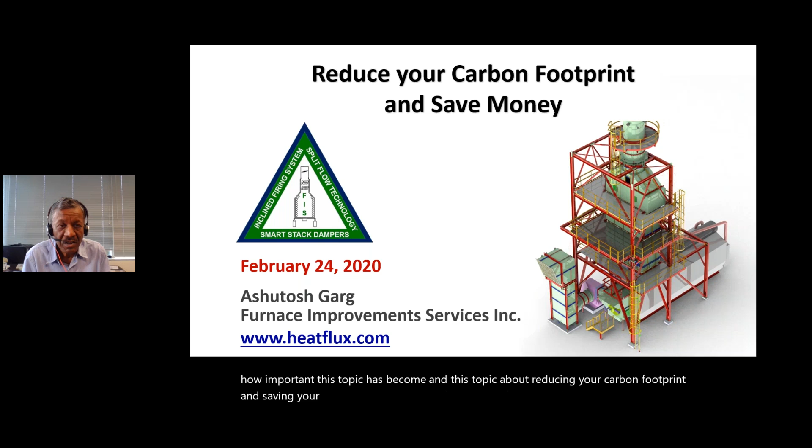So today we will be talking about a very important topic. This topic not only concerns us, but it also concerns every human being on this earth. That is how important this topic has become. And this topic about reducing your carbon footprint and saving your money, some people think it is almost like an existential threat to mankind, the global warming.

So I thought we will talk about this important topic and see how we can do our part, reduce the footprint in our refineries, carbon footprint in our refineries, and at the same time save money so that these projects can pay back. So that's what we will be talking about today.

Especially, all of you know that fired heaters are a major source of carbon dioxide emissions in refineries. It's been categorized as a pollutant and accounts for 2/3 of all the greenhouse gases. So many countries are now imposing tax on emissions of carbon dioxide. I think all of us need to do our part by reducing our carbon footprint. One way is to improve the fired heater efficiency, and that's what we will be focusing on in this webinar.

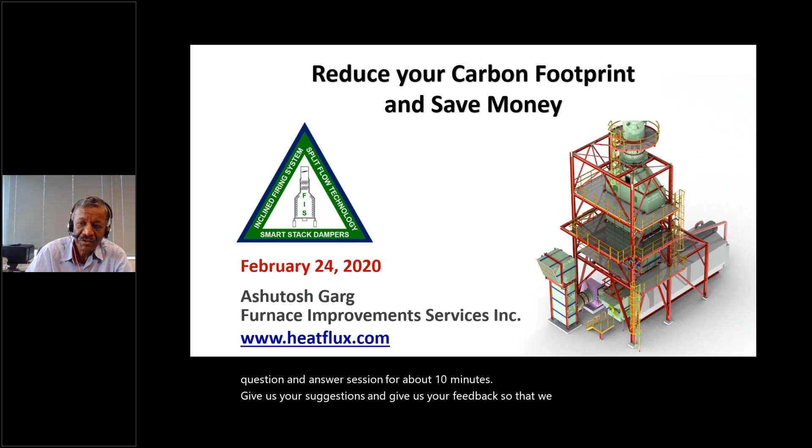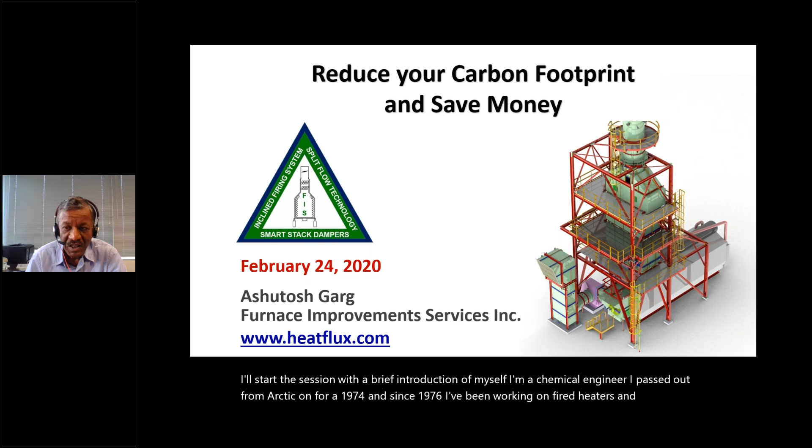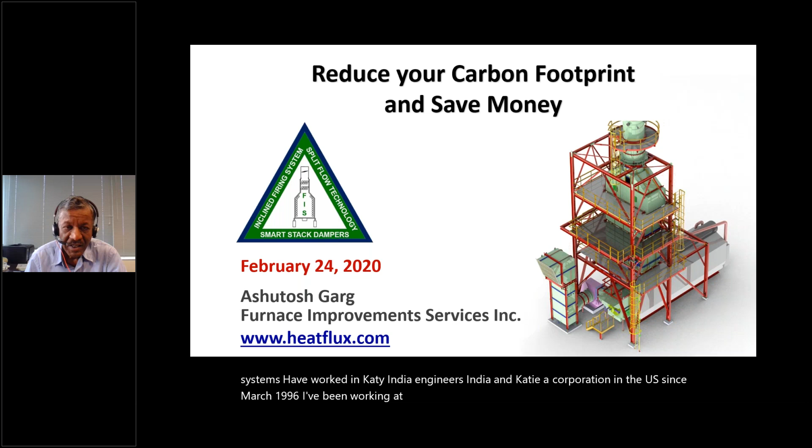I'll start the session with a brief introduction of myself. I'm a chemical engineer. I passed out from IIT Kanpur in 1974. And since 1976, I've been working on fired heaters and combustion systems. I have worked in KTI India, Engineers India, and KTI Corporation in the US. Since March 1996, I've been working at Furnace Improvements, improving fired heaters for the past 25 years.

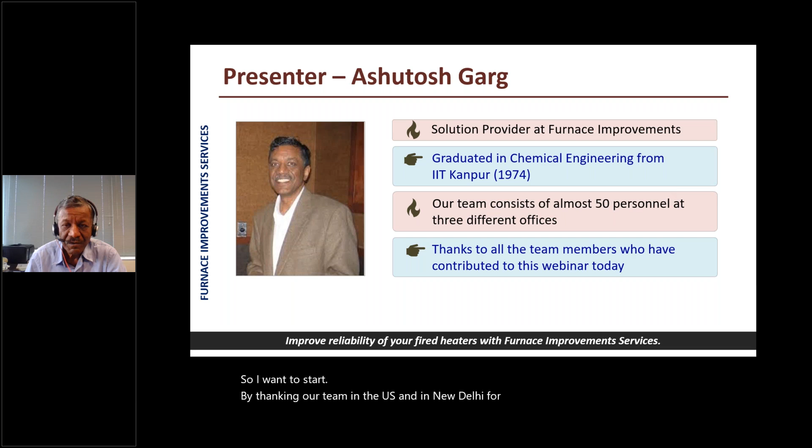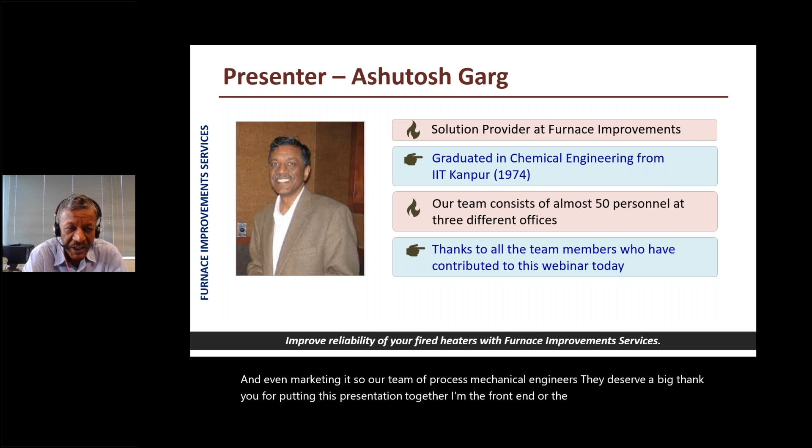Before we talk about our webinar, I need to tell you a little bit about our company. Furnace Improvement started in March of 1996. We'll be completing 25 years next month in business. We currently have 3 offices. Our head office is in Sugar Land, Texas. We have an engineering office in Noida, India. We started it in 2005. We have about 35 people in that office, and this team is doing everything.

They are doing process, mechanical, structural design, drawings, as well as drafting. We also have a 3D modeling capability. We are a full service heater company and we execute projects on a turnkey basis, including erection. We have a CFD office in Pune, India. We started it in 2014. Our CFD team has been working exclusively on combustion, heat transfer, and fluid flow problems.

We have been working on improving the performance and efficiency of existing fired heaters for 25 years now, and we have carried out these revamps in a very, very systematic way. We have also challenged the conventional approaches being followed in the design of fired heaters. We have some new technologies that can help in reducing carbon footprint and can also help in improving the efficiency of fired heaters at a much lower cost than the conventional revamp.

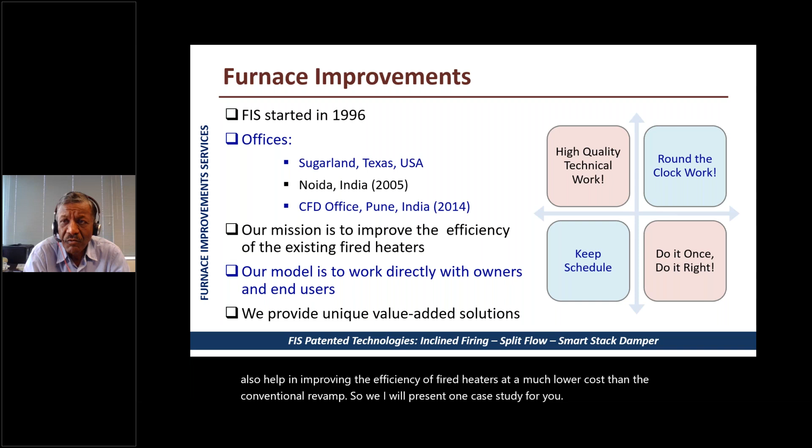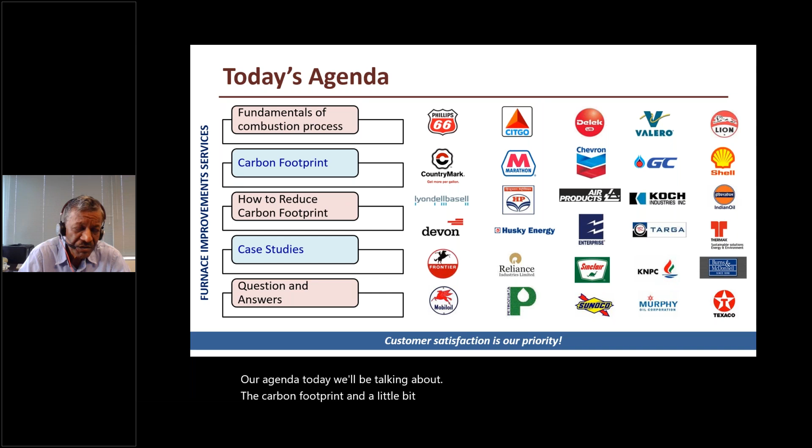Our agenda today will be talking about the carbon footprint and a little bit about the combustion process, and how we can reduce our footprint, how we can minimize the carbon dioxide emissions. I have some case studies for you, and after that we will be talking about question and answers. We will be having a question and answer session.

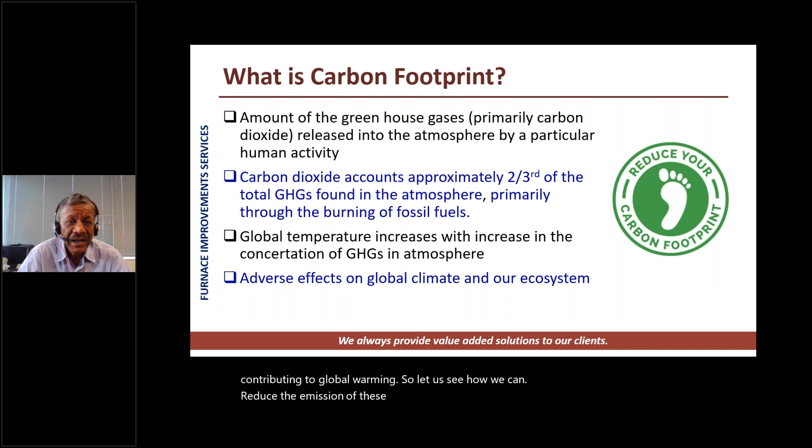I think all of you are familiar with fired heaters. It's a very unique equipment, used for high temperature heat transfer. It's used in places where heat exchangers are not economical. For high temperature heat transfer, fired heaters are the only economical way of achieving that.

One keyword which differentiates this equipment from the rest is fire. We have combustion taking place inside the furnaces, and that distinguishes it from the rest of the equipment.

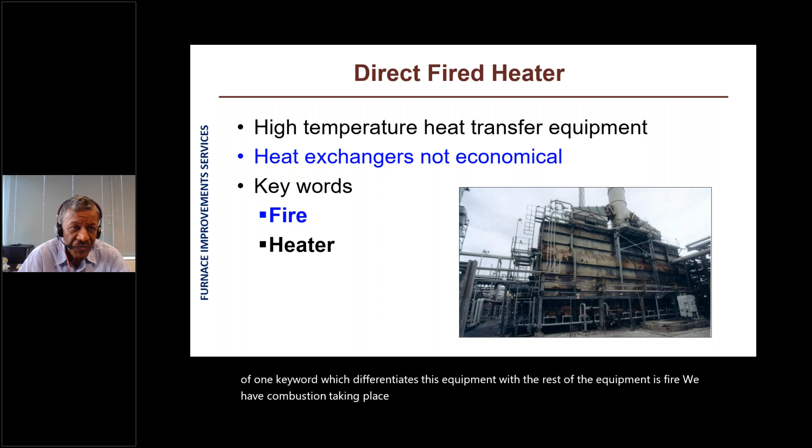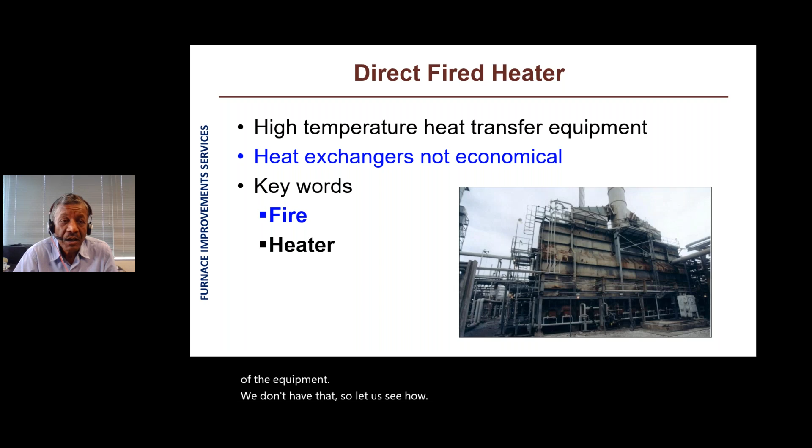We don't have that. So let us see how we can understand and improve our furnaces, improve the efficiency.

In fired heaters, hydrocarbon fuels are burnt, and the chemical energy in those fuels is converted into thermal energy or high temperature flue gases. Those high temperature flue gases radiate heat. So 60 to 80% of the heat to the fluids is transferred by radiation, and anywhere between 20 to 40% of the heat is transferred by convection.

So radiation and convection are the two major means through which heat is transferred to our fluids like crude oil, vacuum feed, or hydrocracker feed, and then they are heated and distilled.

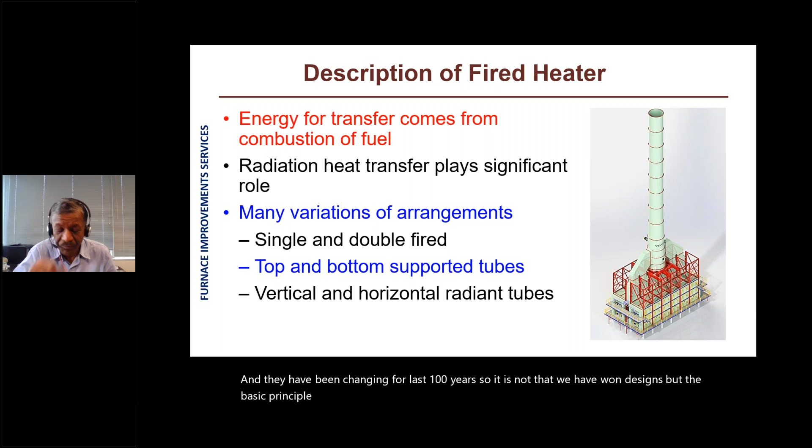There are many types of fired heaters, we are not going to go into details. Single fired, double fired, top supported, bottom supported, vertical and horizontal radiant tube. There are different configurations, and they have been changing for the last 100 years. So it is not that we have one design, but the basic principle has remained the same.

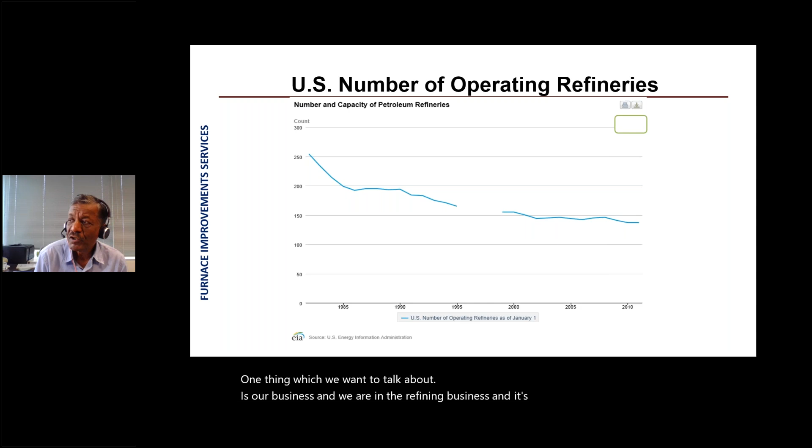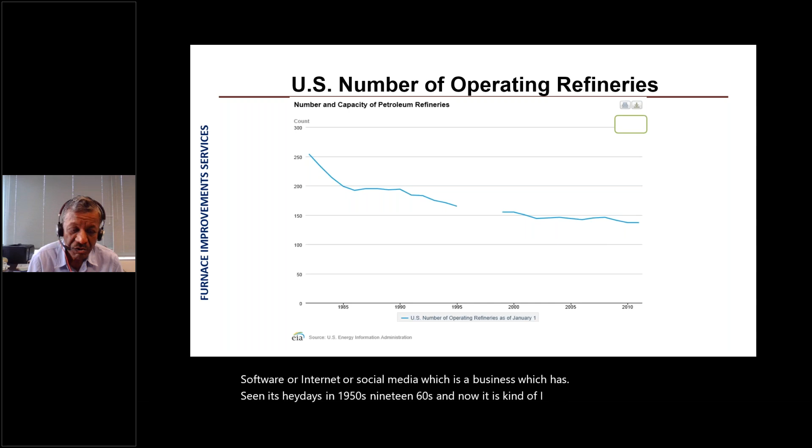One thing we want to talk about is our business, and we are in the refining business, and it's a very matured business. It is not like software, internet, or social media. It is a business which saw its heyday in the 1950s and 1960s, and now it is kind of, shouldn't say it, but it is in a declining mode.

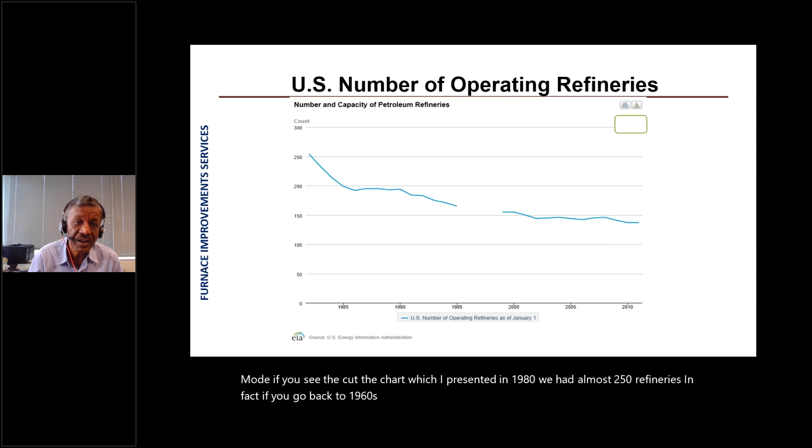If you see the chart I have presented, in 1980 we had almost 250 refineries. In fact, if you go back to the 1960s, we had 330 refineries in this country, in the US. And today, the number of refineries is down to 135. So almost 200 refineries have closed down in the past 50 years.

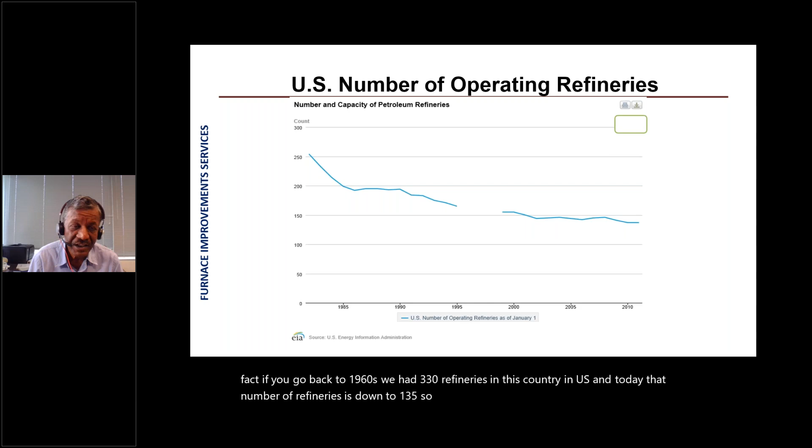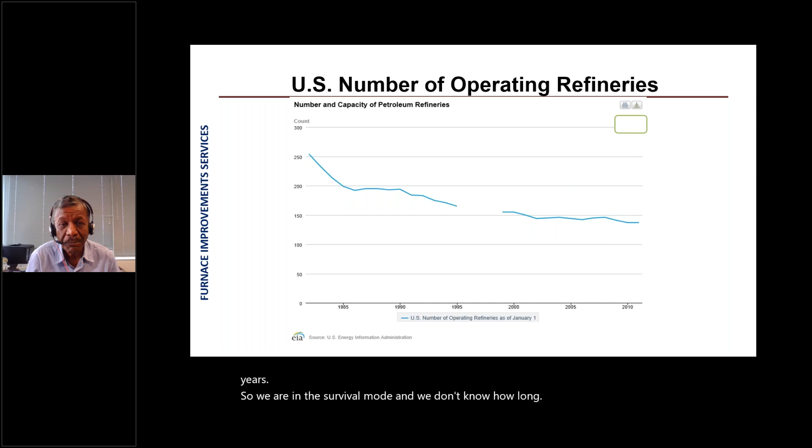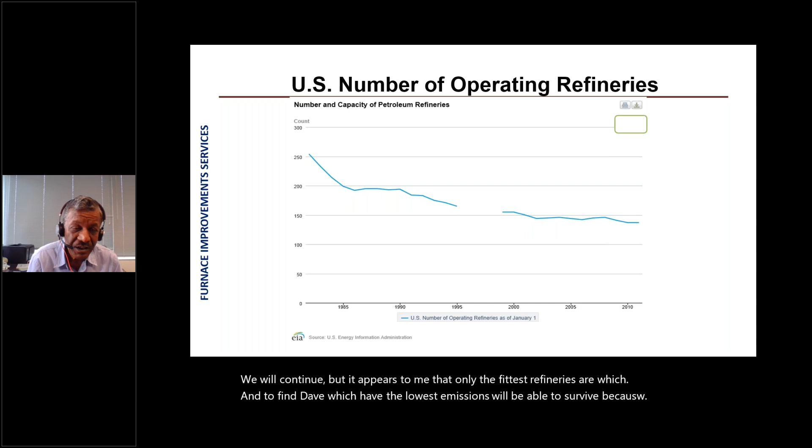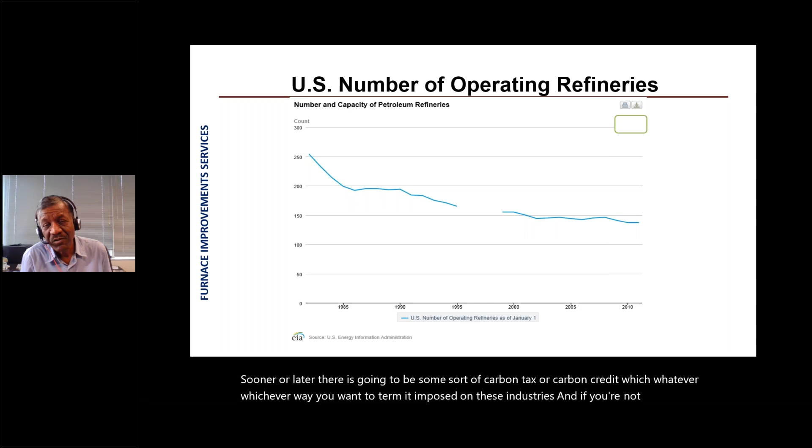So we are in survival mode, and we don't know how long we will continue, but it appears to me that only the fittest refineries, those with the lowest emissions, will be able to survive, because sooner or later there is going to be some sort of carbon tax or carbon credit, whichever way you want to term it, imposed on these industries. And if you're not efficient, if you haven't taken steps to meet the latest challenge, you will be out of business.

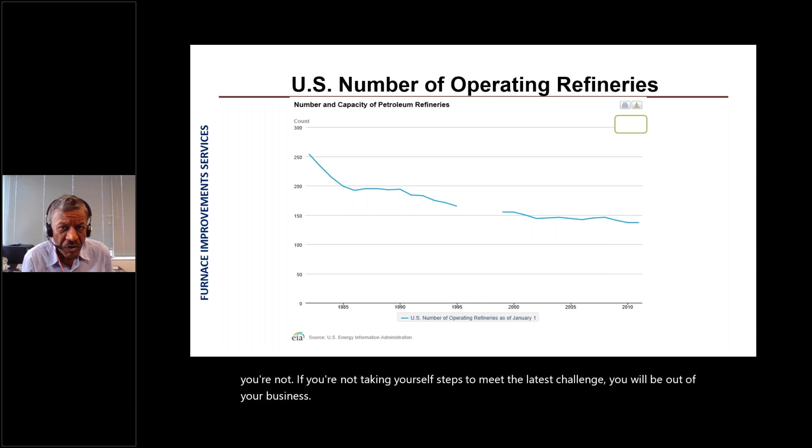So what I did was I looked at the state of fired heaters in the US, and one thing I want to tell you is that even though the number of refineries have gone down, our refining capacity has more or less stayed the same. The refineries which are open have been continuously improving and increasing their capacity so that they can meet the country's need of refined products.

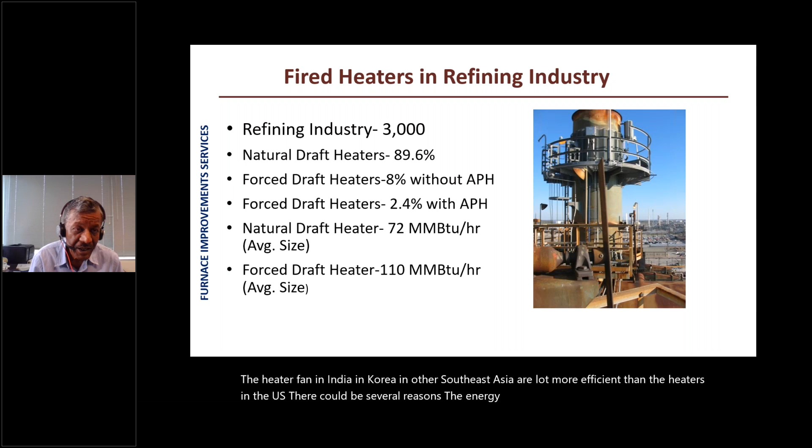We have seen heaters or refining heaters in other parts of the world, and what we find is the heaters in India, in Korea, in other Southeast Asia are a lot more efficient than the heaters in the US. There could be several reasons. The energy cost there is very high — that could be one reason. Other reason could be that these heaters are much newer, whereas in the US, the refining industry is pretty old. So that could be another reason.

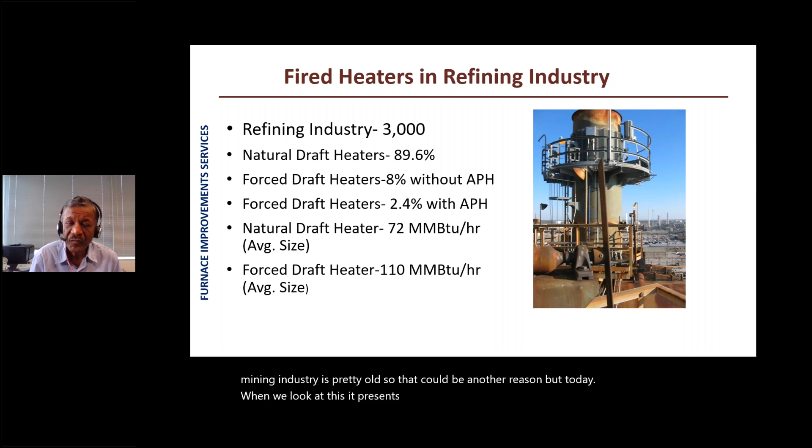But today, when we look at this, it presents us an opportunity to reduce carbon dioxide emissions and also reduce the fuel cost by improving efficiency.

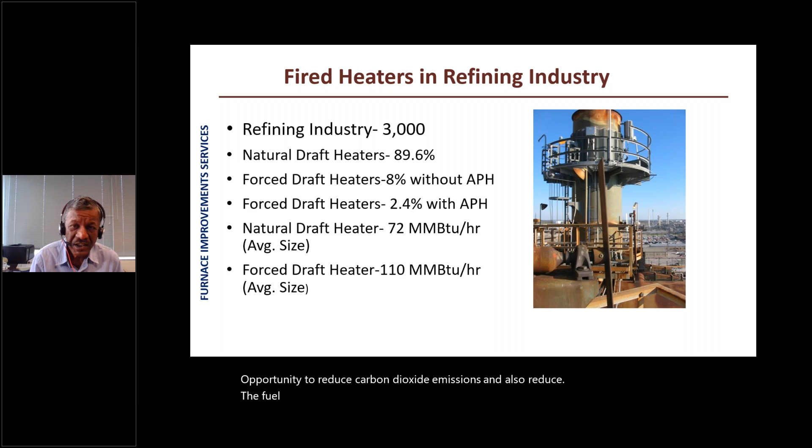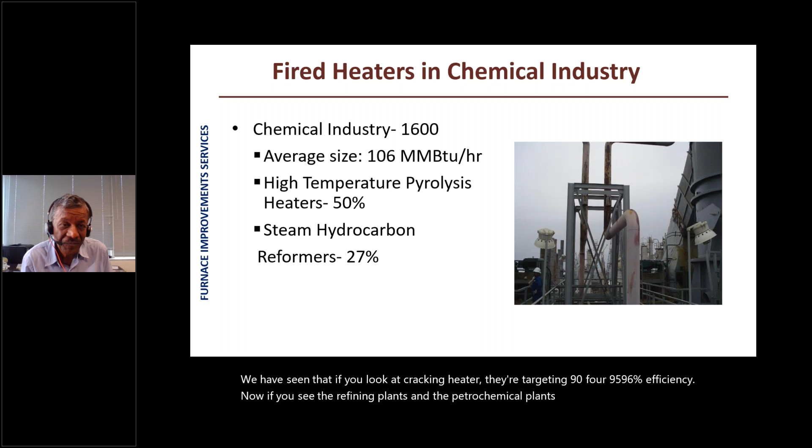Now, one thing which we have observed is the fired heaters in the chemical industry are a lot more efficient than their counterparts in the refining industry. We have seen if you look at cracking heaters, they are targeting 94, 95, 96% efficiency. Now, if you see the refining plants and the petrochemical plants side by side, on one side we have heaters which are 70% efficient, and over the fence, the next plant, we have heaters which are 95% efficient. And it's very hard to understand why is there a difference of approach.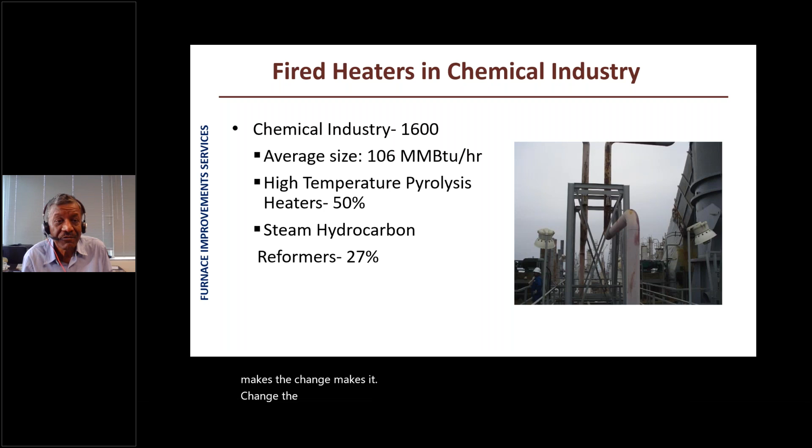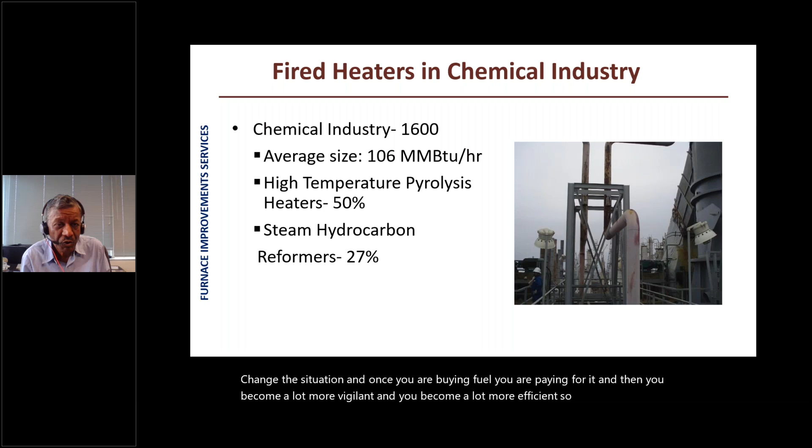And to me, it appears that it could be the fuel cost. In refineries, the fuel gases are practically free, and it's only the bought out gases which cost money, whereas in the petrochemical plants, all the fuel is bought out. So that kind of changes the situation. And once you are buying fuel, you are paying for it, and then you become a lot more vigilant and a lot more efficient. So same company, petrochemical 94% efficient, refining 75% efficient, and it gives us a big potential efficiency improvement potential there.

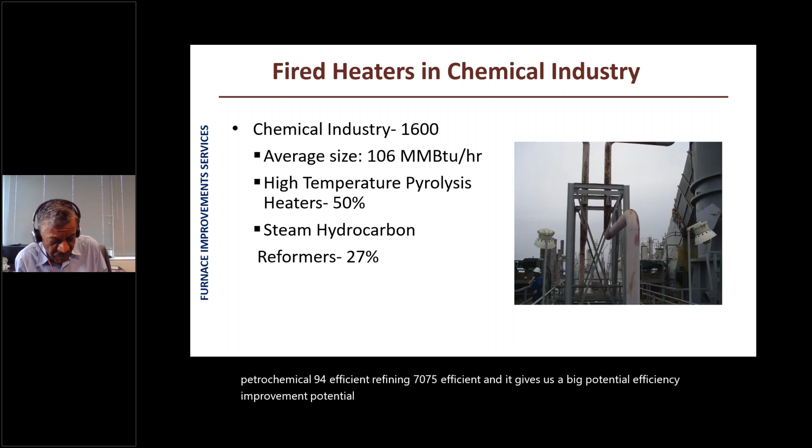So I kind of calculated. I did a quick calculation with 2700 natural draft heaters in the refining industry. I estimated about 75% current efficiency, and we can easily raise to 90%. I think we can even go to 95 actually, but let us take a conservative approach to 90% efficiency. And to me, it gives a very quick number of almost $1.5 billion a year — that is how much energy saving potential is there.

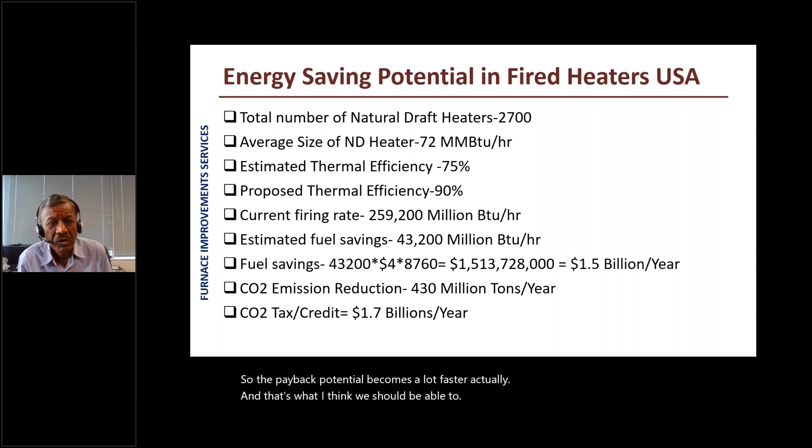Now, how to reduce your carbon footprint? I have listed 3 approaches over here. One is changing fuel to fired heaters. Other is reducing flue gas temperature. The third is reducing excess oxygen in flue gas. So 3 approaches, all simple approaches, is what we can talk about here and do our part and reduce our carbon footprint.

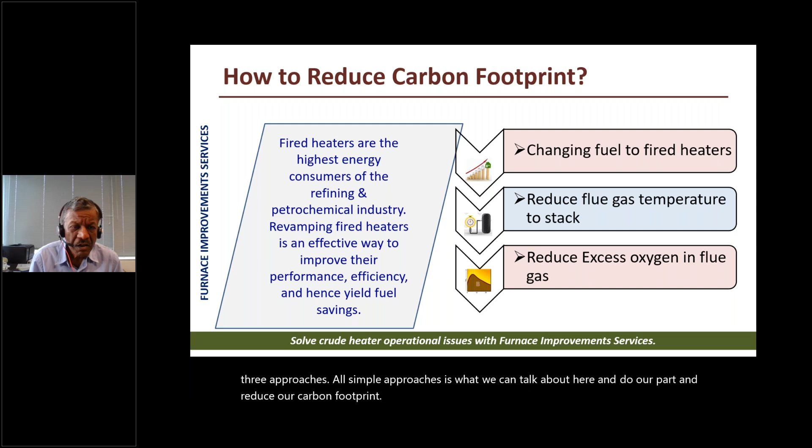So the first research I did is what would happen if you switch to hydrogen-rich fuel gas. And the reason I'm talking to you is one refinery in Europe contacted us and asked what would happen to fired heaters, how would its performance change if we switch to hydrogen fuel.

So I did quick calculations for 3 fuels: natural gas, which is a common fuel in the US and maybe other parts of the world. Then I took a hydrogen-rich gas, approximately 90% hydrogen, 10% other. And the third is fuel oil number 6. I don't think anybody is firing fuel oil, but most people are firing fuel gases. And I did a comparison.

What I found was if we switch from natural gas to hydrogen-rich gas, we can cut down our CO2 emissions by almost 50%. Now, if you switch to pure hydrogen gas, you are cutting it down to almost 100%. But the question is, from where are you getting this hydrogen gas?

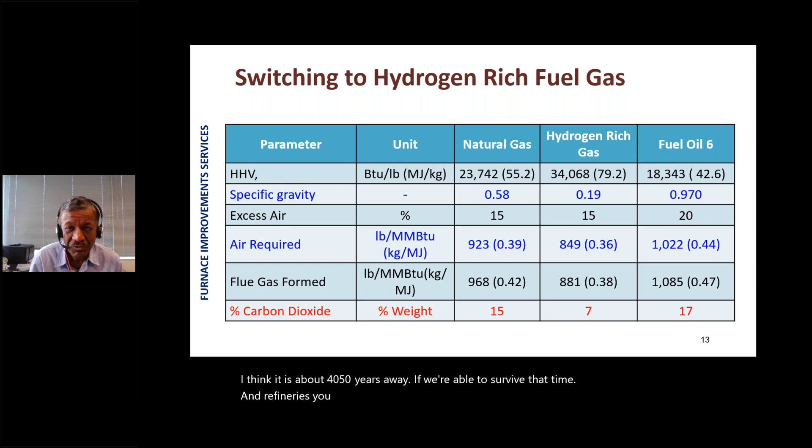So my focus will be how can we minimize the heat losses in the fired heaters and maximize the efficiency and thereby the reduction. So a thumb rule is every 35-degree reduction in stack temperature increases the heater efficiency by 1%. And if you reduce your excess air by 15%, it gives you another 1% efficiency improvement.

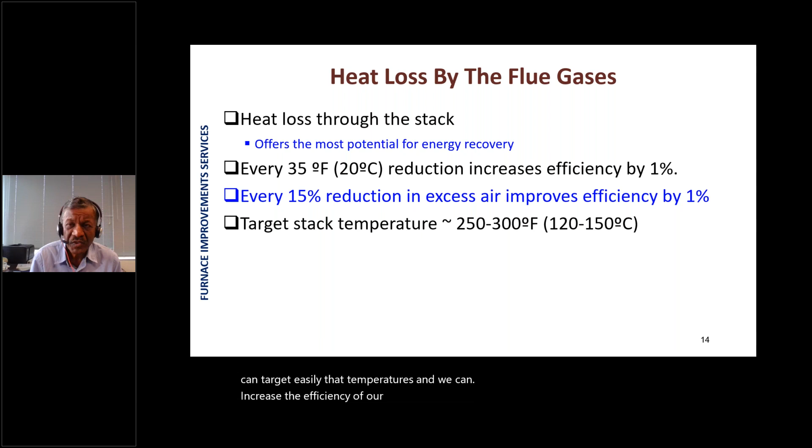So today we can start targeting 250 to 300 degrees Fahrenheit stack temperature. We can target that easily, and we can increase the efficiency of our fired heaters to almost 94%. This is a typical trend we see, starting from 1960 around 75%, and then we had the two oil crises which helped us improve the efficiency of fired heaters, and today we are looking at 94%.

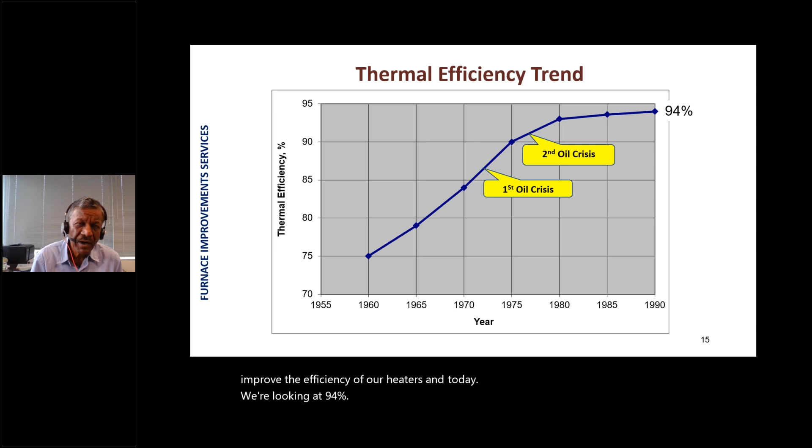So why 94%? Why can't we go to 100%? We have two major limitations. One is the inlet fluid temperature - the flue gas temperature needs to be approximately 30 degrees higher than the inlet fluid temperature. And then the acid dew point - the tube metal temperature should be 20 degrees higher than the acid dew point to avoid condensation.

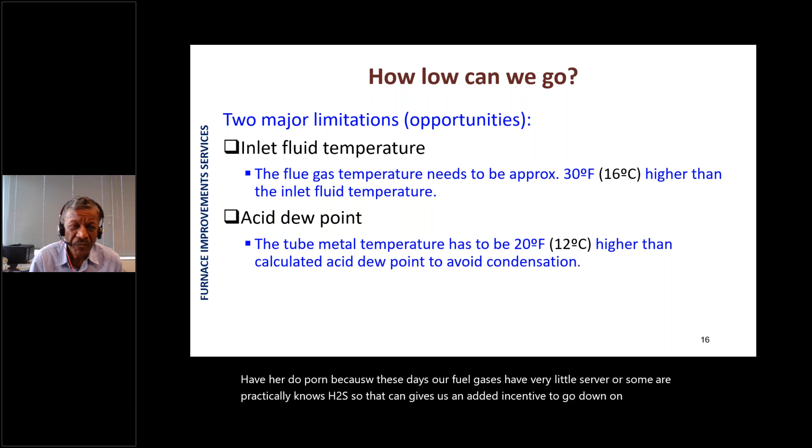So these are the two limitations on our efficiency. We can work on acid dew point because these days our fuel gases have very little sulfur, or some have practically no H2S. So that gives us an added incentive to go down on the lower side of the flue gas temperature.

I'm showing a curve over here. It basically talks about percentage H2S in fuel gas with respect to the dew point. And we are almost at very, very low levels - I mean this is 0.01, we are even lower.

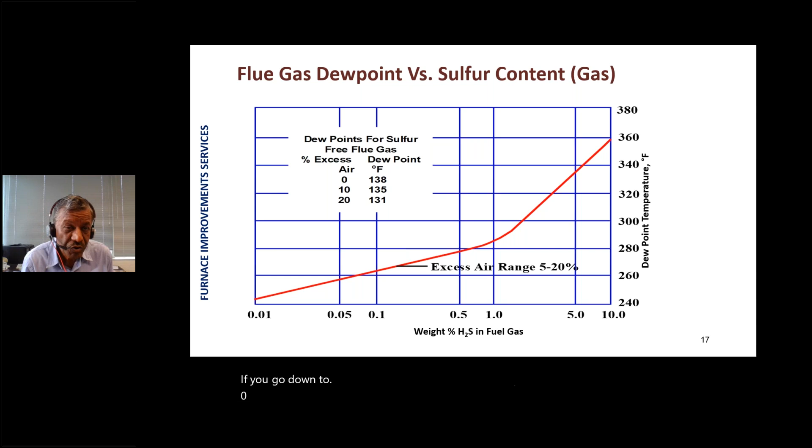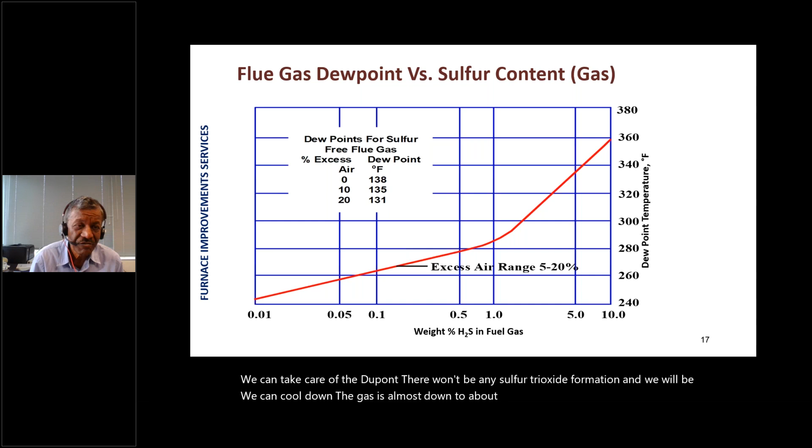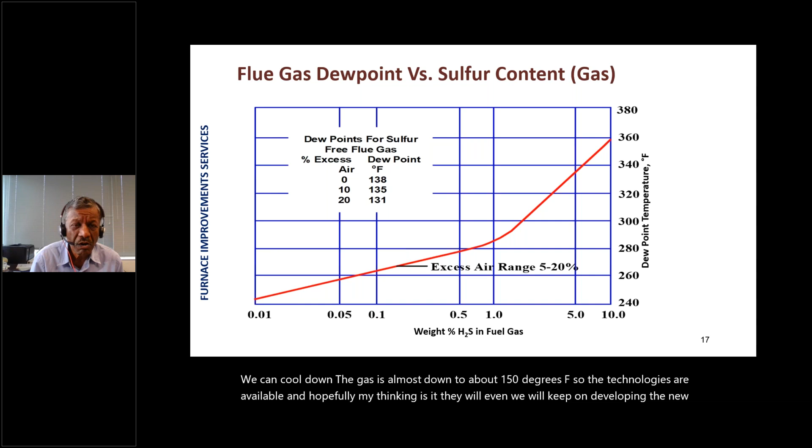Now, I do want to tell you that if you reduce excess O2, the dew point keeps coming down. So if you go down to 0% excess O2, which may be possible, we can take care of the dew point. There won't be any sulfur trioxide formation, and we can cool down the gases almost to about 150 degrees F. So the technologies are available, and hopefully we will keep developing new technologies to go down to almost 100 to 150 degrees F.

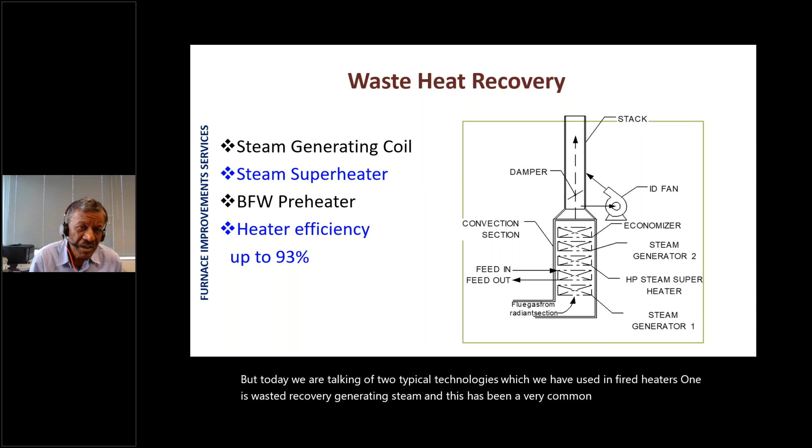But today we are talking of two typical technologies which we have used in fired heaters. One is waste heat recovery, generating steam. This has been a very common method for generating steam in cracking furnaces and steam hydrocarbon reformers. If you need steam in your plants, this is a very good way of recovering heat from hot flue gases.

I mean, you can recover heat to preheat boiler feed water, you can recover heat to superheat the steam, and then you can generate steam. So up to 93%, or even sometimes up to 95% efficiency can be achieved.